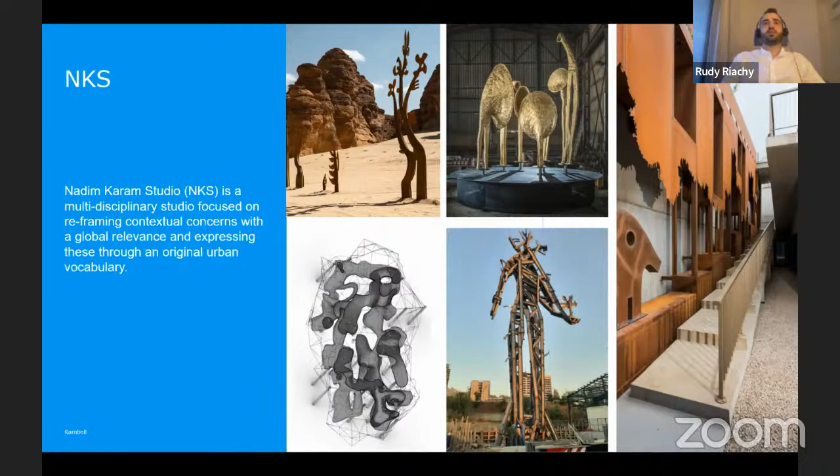So a bit about my background. First, I worked for 5 years in an architecture and arts office with Nadim Karam Studio and the artist Nadim Karam. We've done amazing sculptures, large-scale sculptures and architectural projects. And during that phase, after graduation, I was on a self-learning process. And because I loved computational design, Grasshopper and Rhino, I pursued this path more. I started self-learning throughout the years.

And after 3 years of work, I decided to do a master's in computational design in Catalonia, Spain. The master's widened my understanding of computational design tools and how to think. I built up my skills. So after finishing the master's and working a bit more with NKS, I moved to Ramboll to lead the computational design team. And since then, I've been less than a year at Ramboll, and we've done a lot of work and applied computational design in different projects.

And to start with, the idea of what is computational design, for me, I split it into two. First comes the thought, so it's a way of thinking. Then comes the tool itself. So the most important one for me is you need to shift the way you think. You cannot stay as you are. You need to evolve in your ways of approach on a project, approach on a problem, and you need to start using new tools, new thinking.

And of course, the older generation comes to me, someone 50 or 60 years old, a CEO, the owner of an office, a manager. To them, I say that they should know at least what computational design is, how to utilize it in their own work, how to help people train in computational design. And for the young professionals and students, I advise them to start learning the tools more, adding them as a skill set that would enhance their everyday work. And then comes the tool. So first, you know how to think, and then comes how to use the tool through this thinking and apply it.

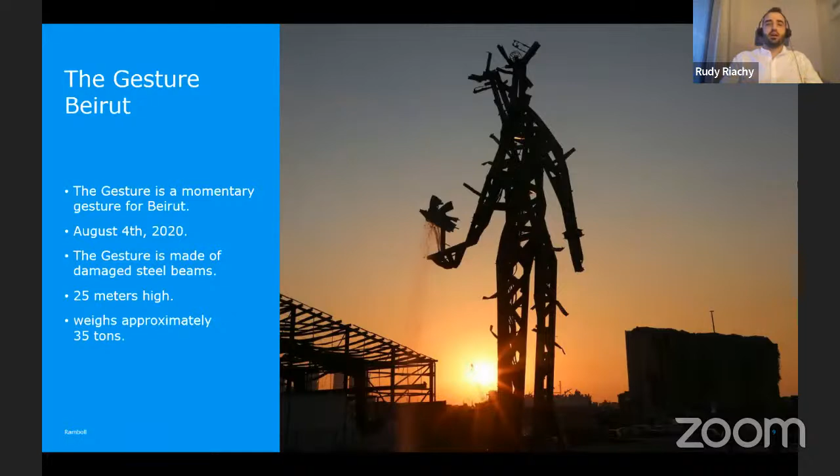After the explosion on August 4th in Beirut, some of you here might have heard of it. There was this big explosion that destroyed the port, destroyed almost half of the city, and a lot of people lost their homes, lost their loved ones, and it was a devastating time for the Lebanese people.

And we had to do it in a crunch time of 6 months. 6 months of not only design, I'm talking design, fabrication, and construction on site. So everything in 6 months. Of course, there's a lot of people here who have some experience, and they know that 6 months is nothing compared to a complex project. So we had to use computation. I had to use computational design to be able to match the deadline.

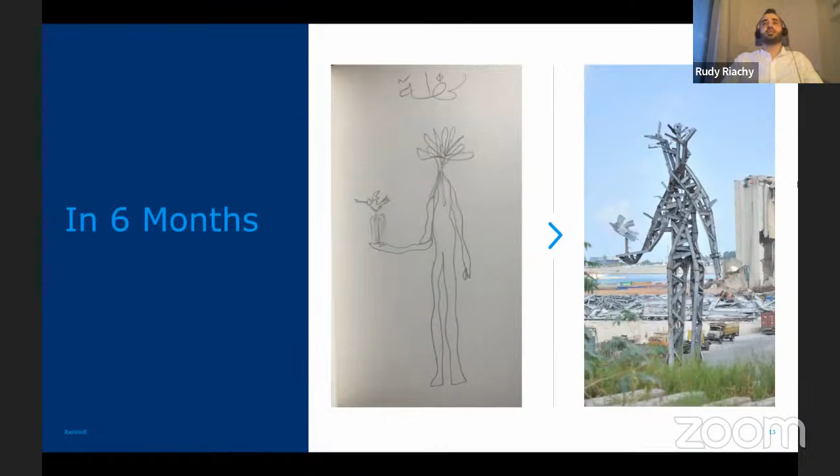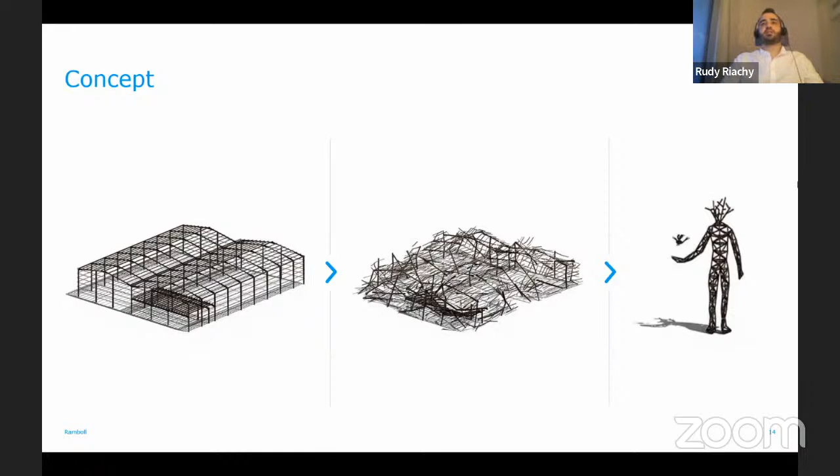Usually when we do these sort of big sculptures, we treat them as a building. So we have the design phase. Now we're thinking of the concept, how the destroyed hangar is being transformed into a sculpture. We did some envisioning of how we want it to be. And then I started working on the design.

So the artist, Nadim, is around 60 years old. He usually does the sketches, and then technically I do everything else. So I get his sketch, I try to create these iterations and options from the sketch. And of course, I didn't model one by one everything you're seeing. I used coding using Grasshopper.

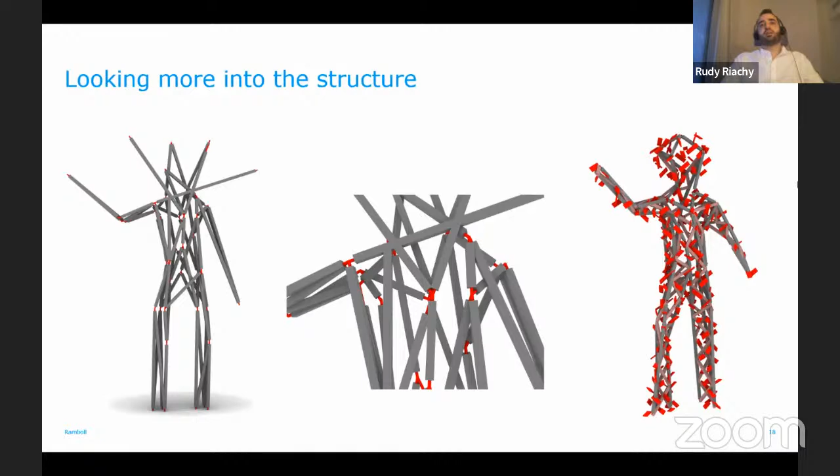Through scripting, I modeled, let's say, the skin, for example. For now, you're seeing the skin of the sculpture. I was testing different orientations, different scaling. So to be able to do it very quickly, I coded it. I also looked at the joints between the steel beams. We were testing different types of joints, different forms.

And the cool part about computational design thinking is you need to always think about the data you have, the information you can get. Everything is important in computational design. So every design option I'm doing is backed up with data, and I extract this data and I compare it with the amount of steel.

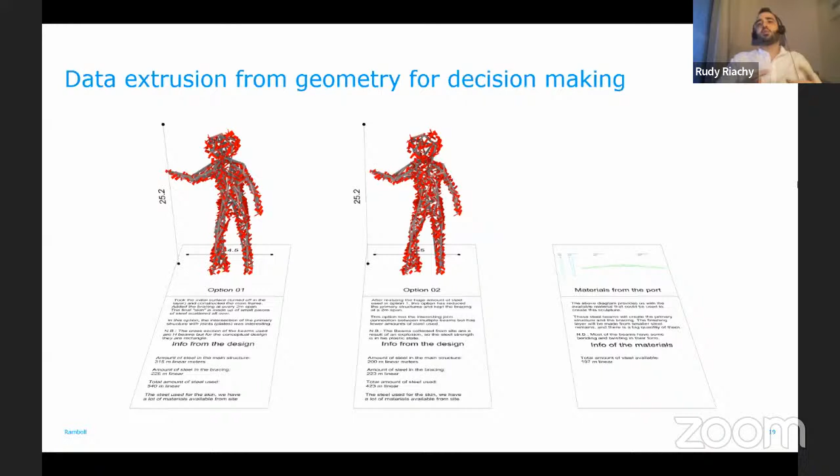For example, here I'm comparing the amount of steel I'm using in each option and how much steel is available from the site. So to be able to match the scale of the whole sculpture and not use excessive steel, while trying to utilize the most amount of steel that we have in the design.

And you can start seeing during the design phase, as we started to think of how it should stand. This comes with experience. I've done a lot of sculptures before using steel materials. So having 3 points of contact on the ground is a very good structural advantage in the design. And you can see these two colors on the body. One is the main structure and the other is the bracing. So we're already thinking early on about the structure together with the design.

And in a way, I'm doing both. I'm acting as an architect and as a structural engineer almost at the same time. Although I'm an architect, I'm getting some help from our engineering consultant, but the help I was getting is some guidance on, let's say, spans, connections and stuff like that.

So after looking at this, I was thinking, okay, this is a nice design. This might work, but the only issue is how to construct it. We are a bit tight on time. I think if I give them this 3D model to construct, it would take the whole 6 months to construct it, because every point is flying in the air somehow, and you have to locate it in 3D space.

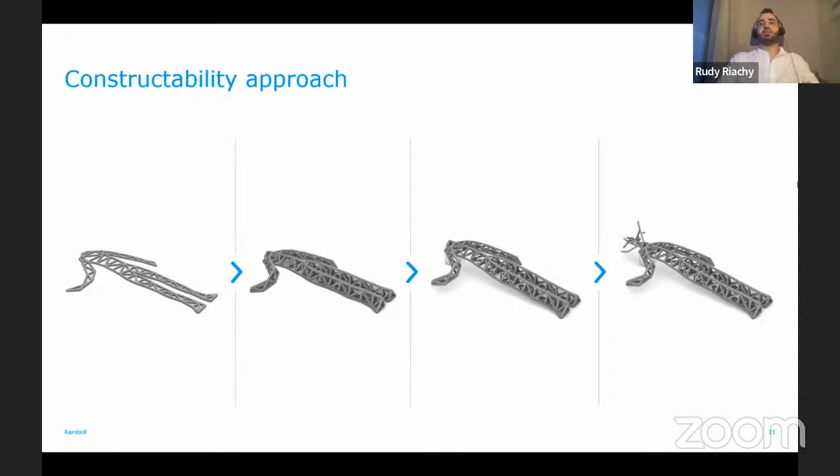So I came up with this idea: why don't we try to redesign it, but start flat with a 2D layer. So the people on the construction site can start on the ground, build the first layer, and then the second layer would come as an extruded version of it. And we elevate it and we do the head, which is the only part in 3D space, which is very easy compared to the previous design. And when I showed it to everyone, everyone supported this, the artists and even the engineers.

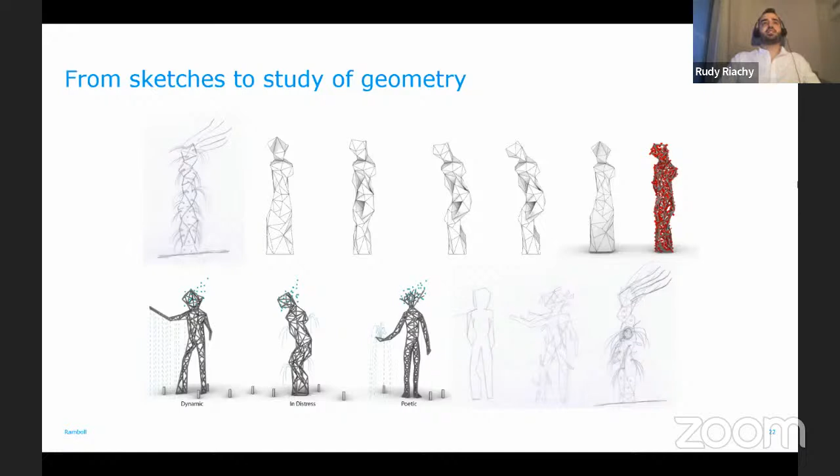So if I spent each week designing one option with its iterations the traditional way, we wouldn't finish. So of course, going back to meshing and using some scripting, I was able to create all these iterations from these sketches. And eventually the artist chose the dynamic version.

And this is what he liked, and this is what we took as reference. And going to site, I was a bit shocked by the scale of the beams. So when you work in the digital world, you're away from the actual site. When I came to site, no one can lift one beam. So you need to use these machines to lift every beam and to place them on site.

But now the issue is we designed it with perfect beams, but actually the reality is these beams are destroyed. These beams are damaged beyond repair. And the purpose of our sculpture is to use these damaged beams to create this design. So someone came up with an idea of 3D scanning the beam. And it was for me the first time professionally working with someone on a 3D scan.

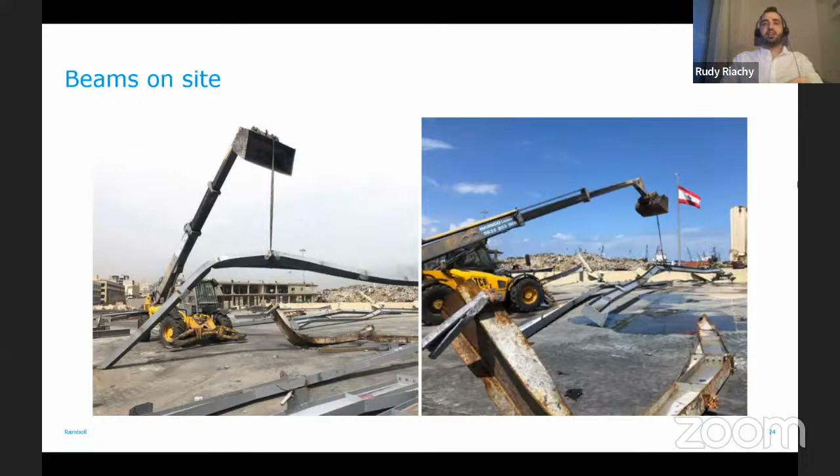The 3D scan company that we contacted was new in Lebanon. What I expected from them is to give me each beam scanned in a nice 3D file. However, they gave me one big file, a 30 gigabyte file, hundreds of millions of points. What they did is they placed cameras throughout the whole site and they scanned everything at once, creating one big, huge 3D file.

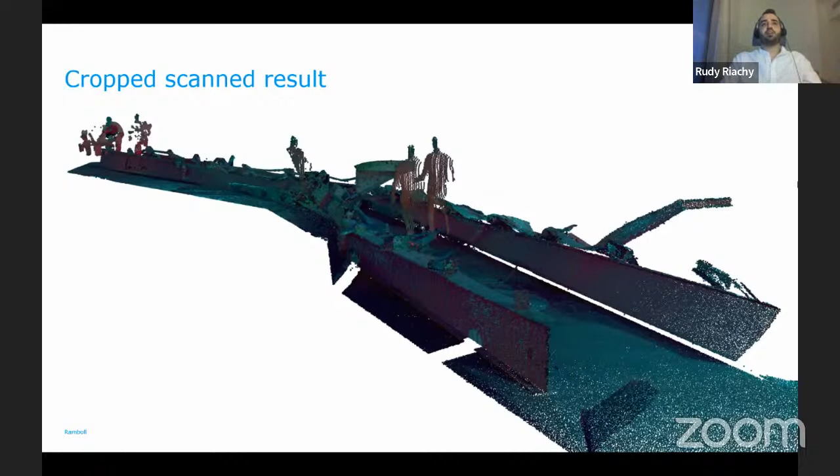What you see now on your screen is just a cropped version from this file. As you can see, they scanned the people, the machines, the floor, the debris, everything is scanned. And you can see all of these are points. This is not a mesh. This is just points on top of points. So this was the first time working on this huge point cloud for me. But it wasn't that new since I already work using computational tools.

So I just learned a couple of software that will help me clean and then try to rebuild using meshing techniques and algorithms to remesh from these points and create these beams. But then these meshes are too accurate, and we thought that we don't need to exactly model all the minor damages. What we need actually is the full deformation. So what I did is isolated each couple of beams and then redraw them using some tracing technique in Rhino, and then using Grasshopper and Rhino, cleaning them and then redrawing them.

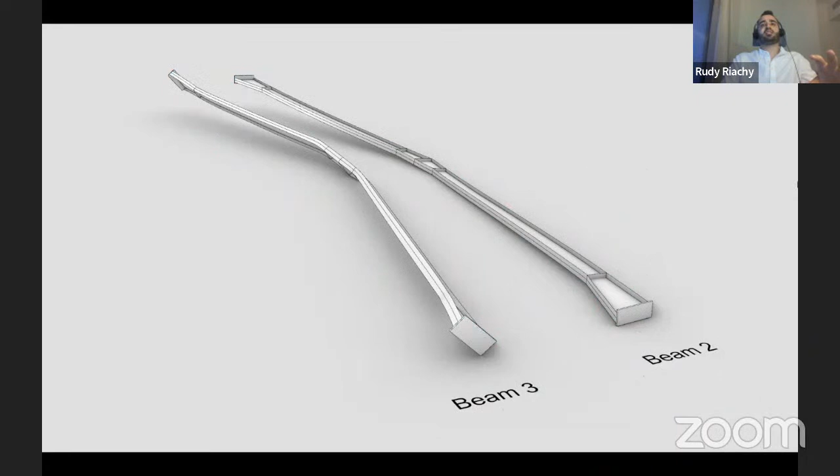And you can see how I extracted from the scan the beam itself in 3D, and this on and on until all the beams that were scanned are modeled. You can see how cleanly they are modeled, and that these are labeled directly. After labeling them on my file, I went on site with a spray and started spraying the labeling onto the beams, not to lose each beam if someone moved it by mistake, to keep the labeling along. And now my OCD is happy.

All these beams are placed in one space. So from here I got the data: how much linear meter of steel we have, the shapes we have, and the amount we have. So now we can go back to the design. We created this data sheet of the cross sections of these beams because they're different cross sections. Some beams came from the hangars, some from the roof, some were vertical elements. So each beam had its own size. We wanted to use the big sizes on the lower part of the sculpture.

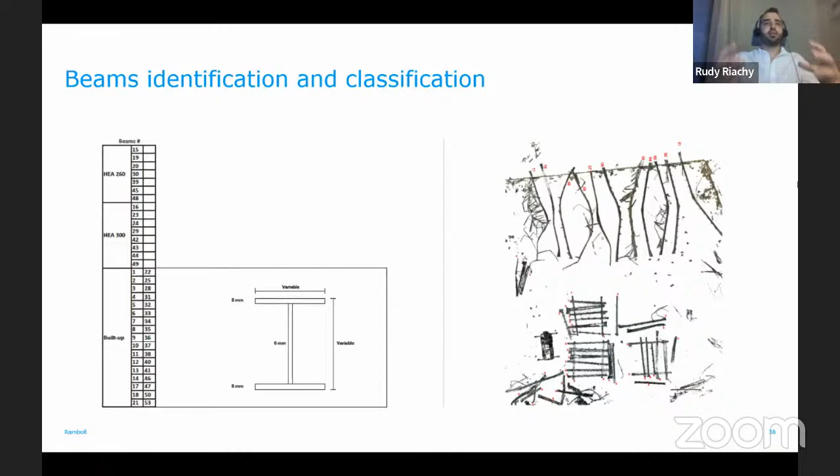And now comes the real work, which is designing. We're taking the 3D model that we did before and placing on top of it the new beams, the real beams, the ones that are distorted. And I tried to benefit from these distortions. You can see the hand is this one element beam that almost looked like a hand; it fit perfectly in that location.

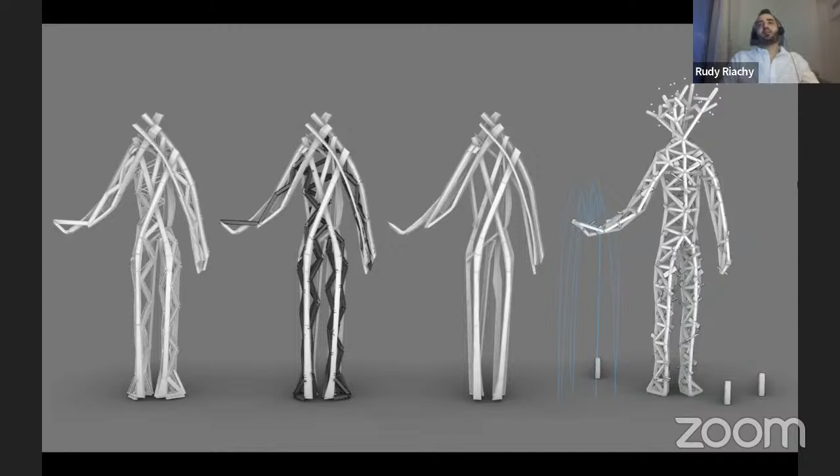So it's a design process where I tried to place the long beams to create the legs and the torso, and the smaller beams to create the hands and other smaller details. And after cutting some beams, also labeling them, tracing them. We went from doing the primary structure, which is the white one, and then the black part is a sort of bracing from the beams, and then we designed the whole thing from the actual beams themselves.

Because we are crunched on time, we don't have the luxury of designing and then sending our engineering consultants the 3D model with the 3D geometry, and then them figuring out how to analyze the structure. What I did is I tried using Karamba, which is a plugin in Grasshopper. Although I'm not an engineer, I understand through my experience, when I get these results, what I can modify in the sculpture.

When I eventually sent the sculpture to the structural engineer to analyze, he came back with maybe 15% of changes. Maybe he added some connections, some minor changes, but the overall design was logical for him. This saved a lot of time, doing the design and the analysis at the same time. Of course, there would also be post modifications. The artist might still change some stuff.

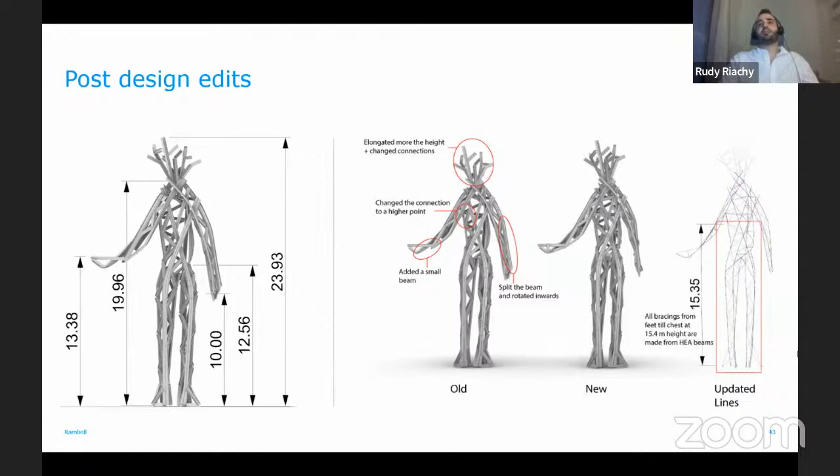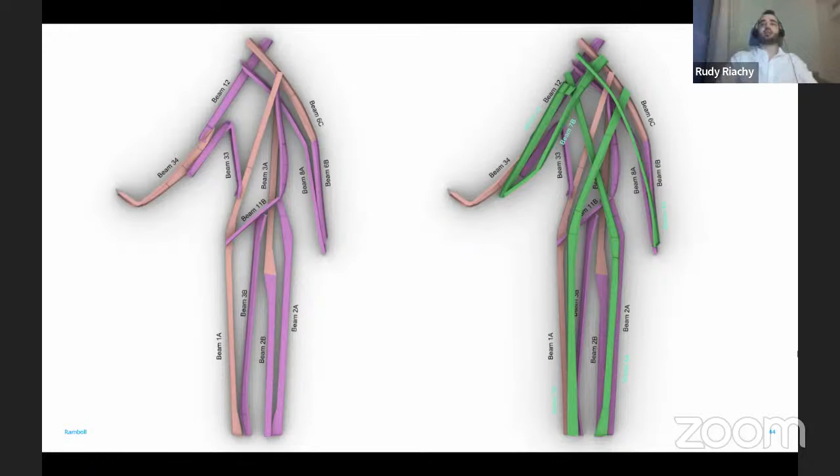These are some of the construction drawings. Earlier I talked about how we were going to build the first layer on the floor. You can see how easy it is now: on the left side, the first layer, they can just place them on the ground, weld them, and then place the green part on the right, on the elevated part. This was super easy on site. You can see all the documentation on where to cut the beams and which beams we will use where. We also created fabrication drawings with the location of each bracing. We even designed this bird on top of the hand of the sculpture.

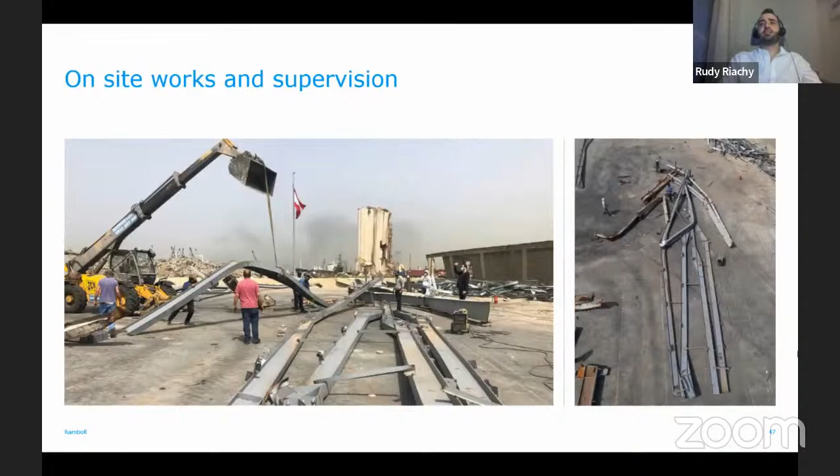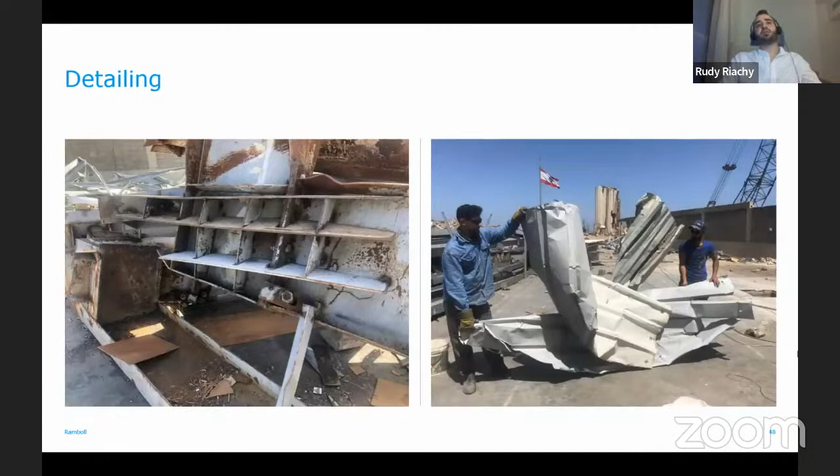I was doing my master's in the meantime while working on this project, so I hoped someone else would take charge of monitoring the site work. But because the drawings are a bit complex and I was doing the whole process, eventually I went down on site again and had them build the sculpture. It was fairly easy. We located the key points on the floor, and then, referring to my fabrication drawings, we were able to build it. I had to make sure all the joints were clearly welded. These are some pictures from the construction site.

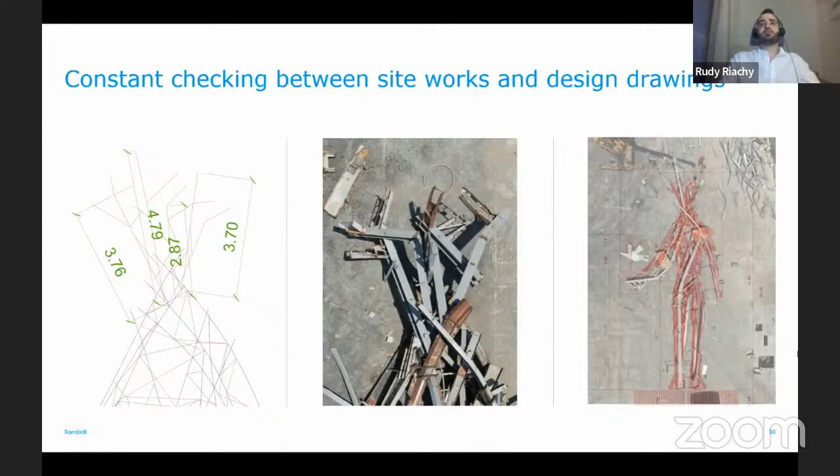This is the site where the explosion happened, behind the sculpture. You can see some zoomed-in shots of the head, how we were building it. On the right side, I always try to double check our work. Since we had access to a drone, I would take a picture, go back to the office, and overlay the drawing on top of the picture. Funny enough, everything is matching except for the hand. The actual hand looks a bit lower than the red digital one. So when we went back to site, we fixed this. All this double checking makes sure everything is in place.

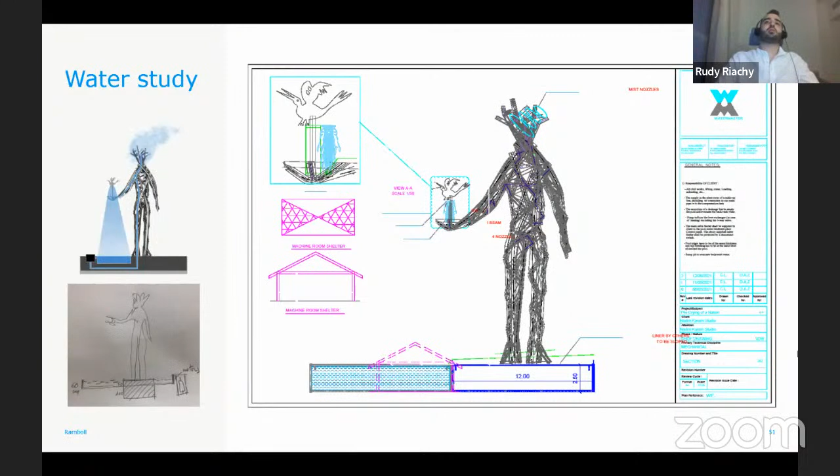Also, the artist wanted a sort of fountain coming out from the hand, coming down to a basin or pool, and then circulating the water for the fountain effect. The pipes weren't designed digitally; these were done directly on site. Sometimes when you're tight on time, you need to work on stuff directly on site. So we made sure that the pipes ran smoothly and were fairly hidden.

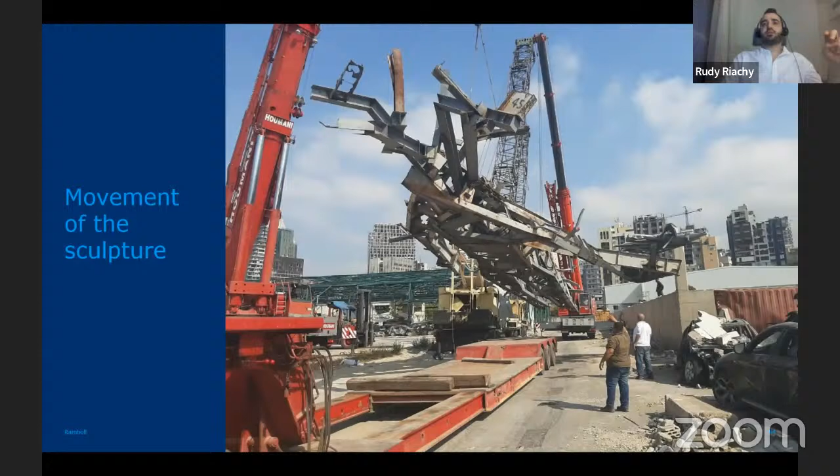Of course, there are other structural studies on the foundation. There were also issues on how to elevate it, how to fix it, and how to pour the concrete. All of these studies were done, and through team effort, we found a solution to make it stand. For the actual moving part, we used two cranes to lift it from the site onto a truck, and then the truck would drive it to the final location.

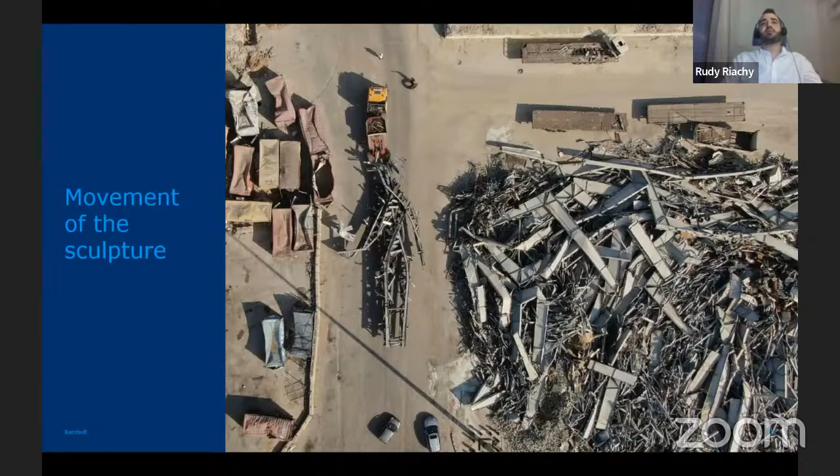Just to know that this sculpture was done without any support of money. Everyone just provided his time and expertise to build this. And so here we lifted the sculpture and we placed it on site. You can see the scale of the sculpture. You can look at the picture on the right.

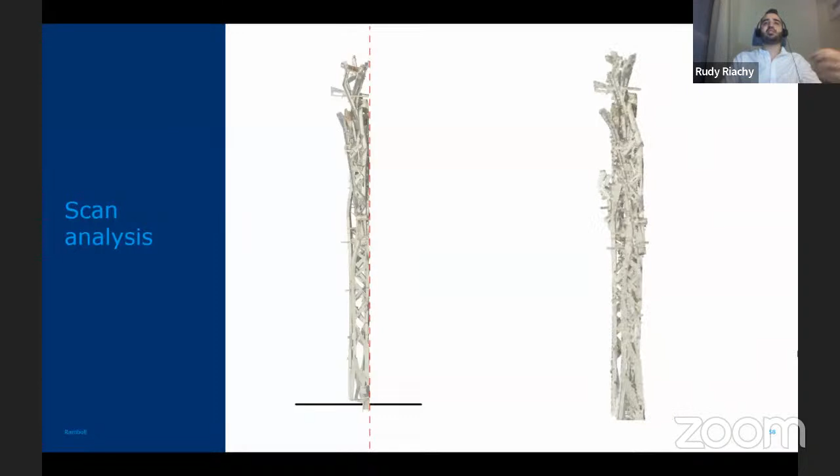And me as, let's say, OCD, I wanted to make sure that the sculpture is really standing straight. So we did another round of 3D scan. I called the same company, and you can see the red line and how the sculpture is standing almost perfectly straight. And this is like the dream of every engineer, for his design to be as perfect as it can be. These are some drawings of the event and some drawings of the sculpture, and this is the end result.

After finishing the sculpture, we had a small discussion in the office of doing a small mock-up model. We were thinking of first doing it by welding small pieces of metal, but then I told them, why don't we do it as a 3D print? I had the 3D printer back then. So using Grasshopper and a bit of computational design, I was doing some different options. Since with 3D printing you can go wild a bit in the design.

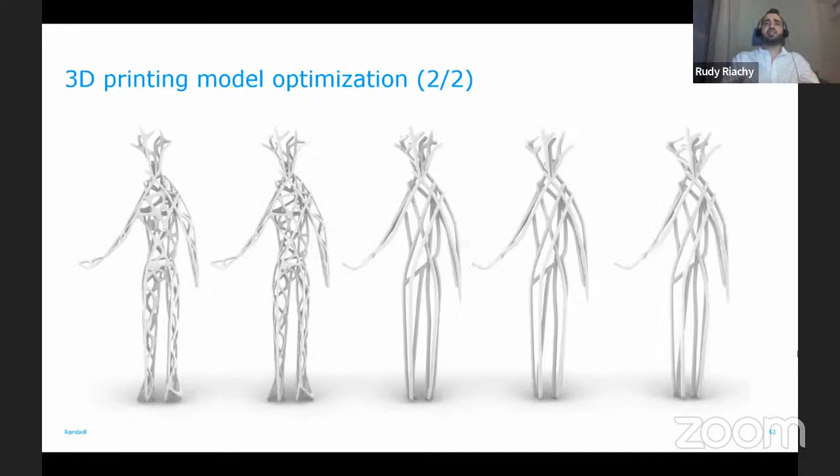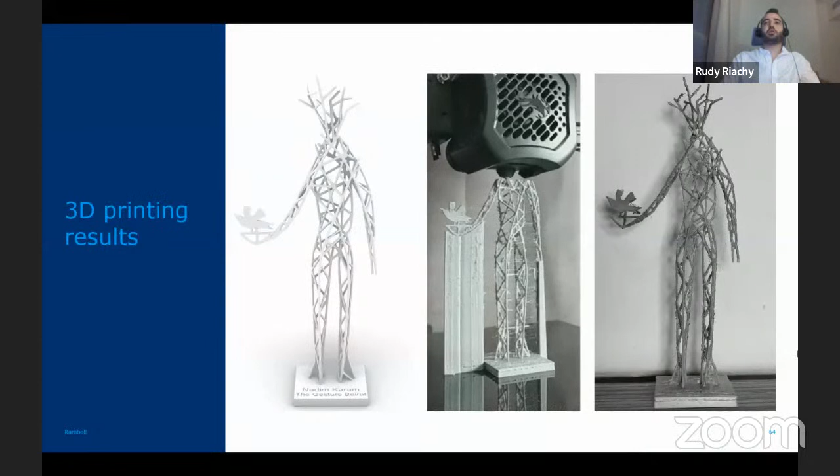Did some iterations, some options, and eventually ended up doing this design. And you can see the process of 3D printing it and the end result on the right side. And this is another, let's say, hobby for me, which is 3D printing. But computational design allows you also to go into these different tools and use them. So this was the first example.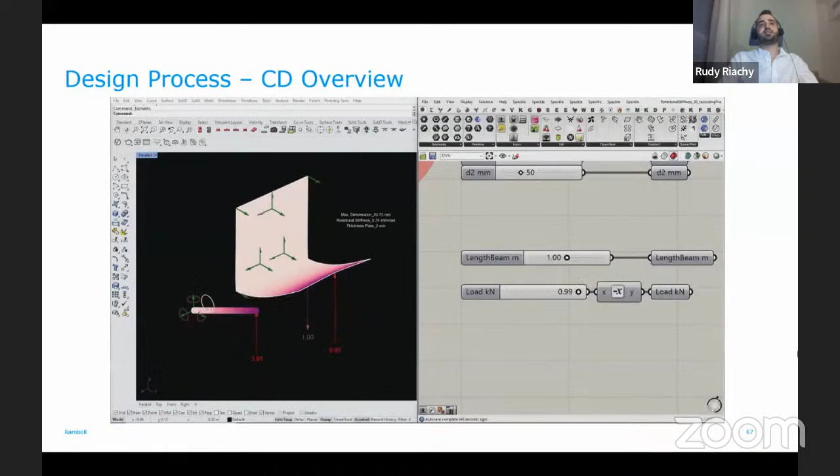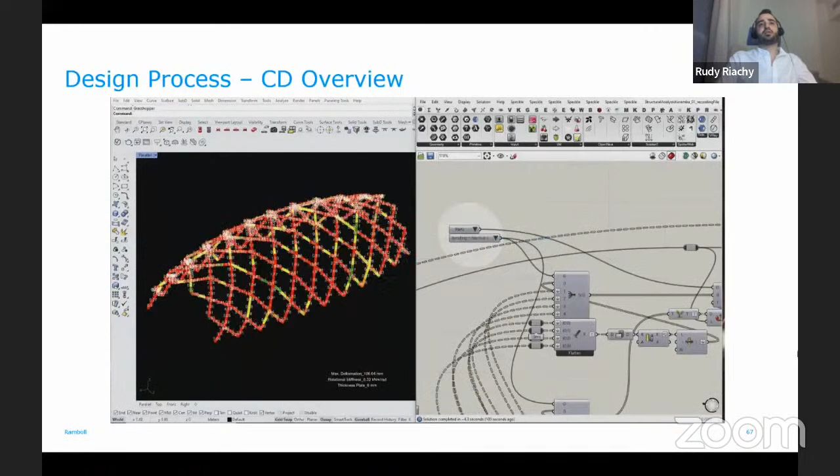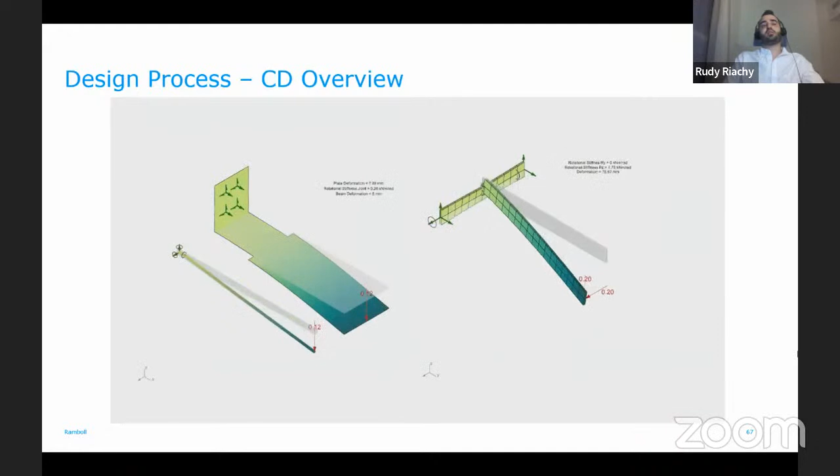And here we're trying different connections, doing mock-up models, testing the stresses and loads, and using all this data to get it back into the software. The more we study it in real life, the more realistic our digital world is, so that we can be as accurate as we can. And here they were testing the bracing and the connections.

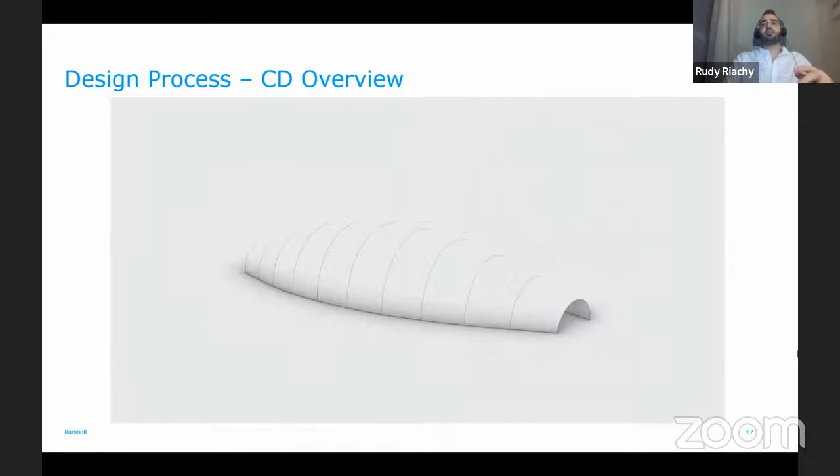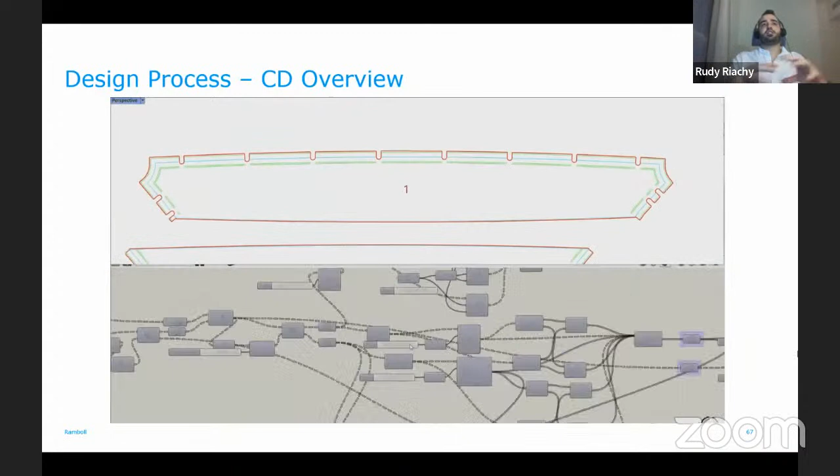After that, we went into how we're gonna build it, the process, and we modeled every single detail in Rhino so that we don't miss anything. Also, for the structure that's covering it, we used Galapagos, which is an optimization technique, to find the best sheet layout, and then also used Grasshopper to automate the 2D drawings from these sheets.

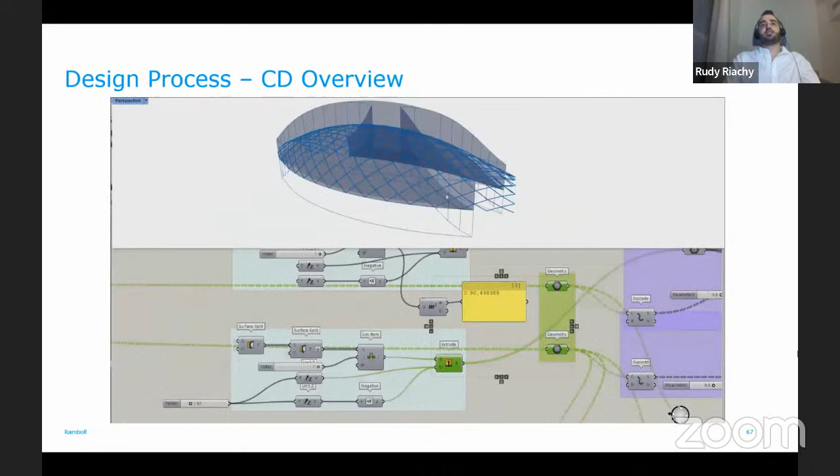So technically, all the process was automated. So every time we did a change early on in the design, on the shape, everything else would update automatically. And that's one of the powers of computational design. But I don't want to only focus on computational design as the tool. I also want to focus on the thinking, as I mentioned before. We cannot get rid of the design process.

You cannot skip these steps—you need to still sketch, you need to still team up, you need to think of solutions. Computation design doesn't replace these steps. In fact, these steps enable computation design.

As you can see, we try to measure the actual scales of stuff, the detailing of connections, and then use this information, this logic, to translate it through a code in a script and then design it. And then we would have more control over the design. Everything we did was well designed and tested by hand first and sketched.

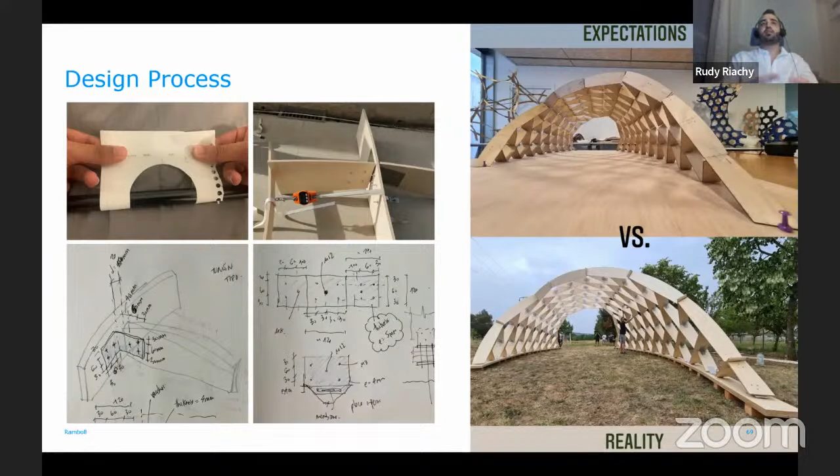And then we moved from this process to the actual code and eventually designing it. Combining this design process with scripting and model making and testing, you can see on the right, the physical model on top, the mock-up model, and the actual building beneath it—it's almost the same. If we Photoshop it a bit more, you won't know the difference. That's the power of having this design process well designed and all the data well plugged into our code and script.

Then came the design building process. We were in charge also of building it, so we made sure that we could lift every element, we could build it by hand without using any machinery. And after building it, the first thing I look at is details.

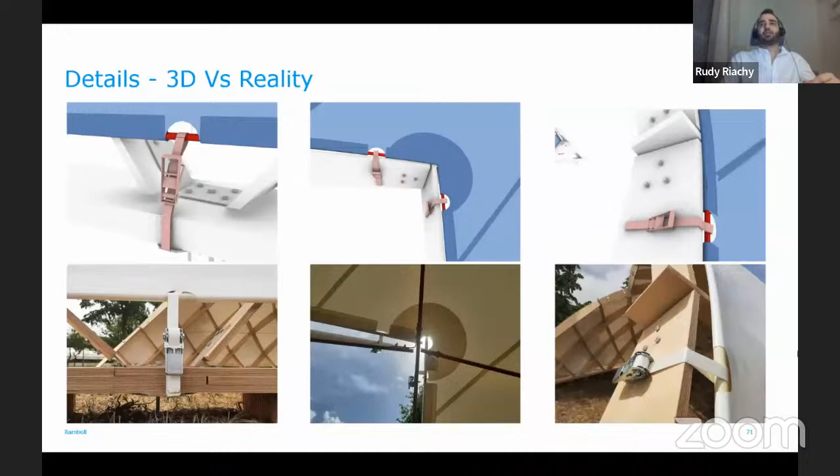As an architect, I love to see this part. So I took the pictures from the model and from the actual built structure, and I start comparing them side by side, which is a fun exercise to see how matching it is. And this is the outcome—the end results were very satisfying.

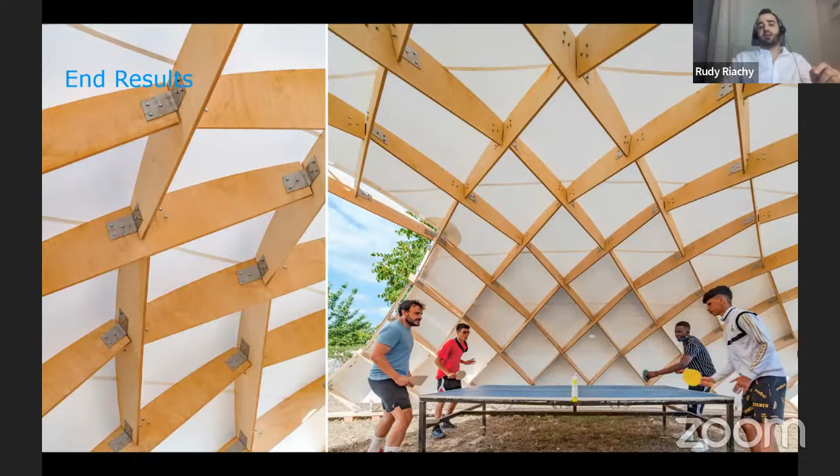This structure was built for a school—a school for students with needs, for special students. And this structure was used for outdoor activities, and also occasionally for outdoor classrooms. You can see how beautiful the structure is standing, very nice and well designed. So this is another power of computation design, shown through this example.

Now, the last example—I was just thinking of how to show you that computation design is not only for engineers or architects, it's just a way of thinking and translating logic into anything. So I picked an example which is a bit unorthodox.

It ties in with a small story. Before joining Ramboll, I was going to join a PhD program in Germany, and one of the interviews was with one of the candidates who might be hired for this PhD program. They had this exercise for us, and the PhD program dealt with diatom shells. They were studying these cellular geometries, structures of diatoms. A diatom is like a one-cell structure, and because it's a one-cell structure, the structure should be efficient, it should be good, and because nature is the best reference for us—

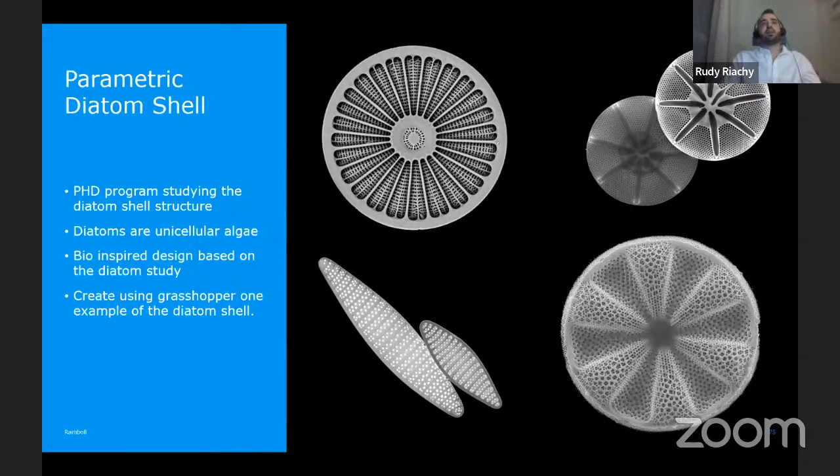part of the PhD's purpose was to study these organisms and try to imitate their structural behavior or structural design, and then apply it to real-world design solutions. So the exercise was for me to pick one of these diatoms, which I picked—its name is hard to read, I read it once: Actinoptychus splendens. I picked this because it intrigued me. I love the challenge, and I wanted to show them that I could design it through computational design.

So I did some research about this. This was a one-cell circular shape. It had mountains and valleys, two layers, and each layer had a different sort of perforation. This is a small explanation based on observations from scientists and from what you see in the picture—this was the only microscopic picture I had as reference.

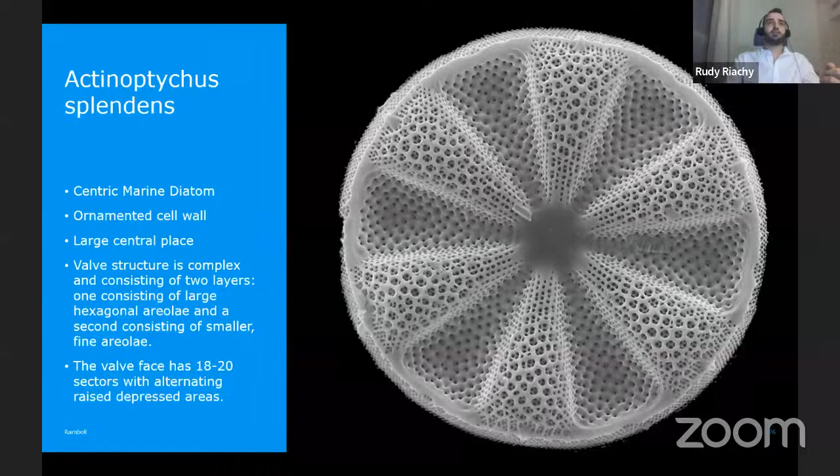Now I'll show you the thought process of how I used computation design thinking and the logic to dissect a geometry and build it through coding. First, I took a circle, sliced it like a pizza into triangles, and then these triangles would form these mountains and valleys. Step three would be having them alternate and creating two different layers, because the structure is made from two layers—so I made sure there were two layers inside.

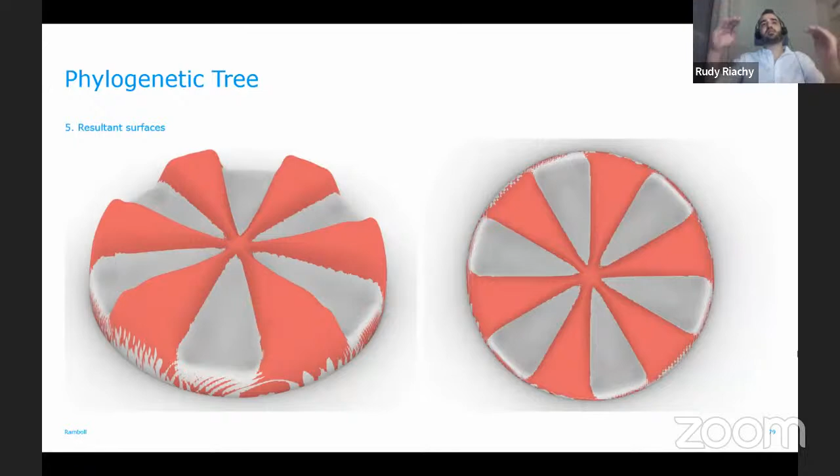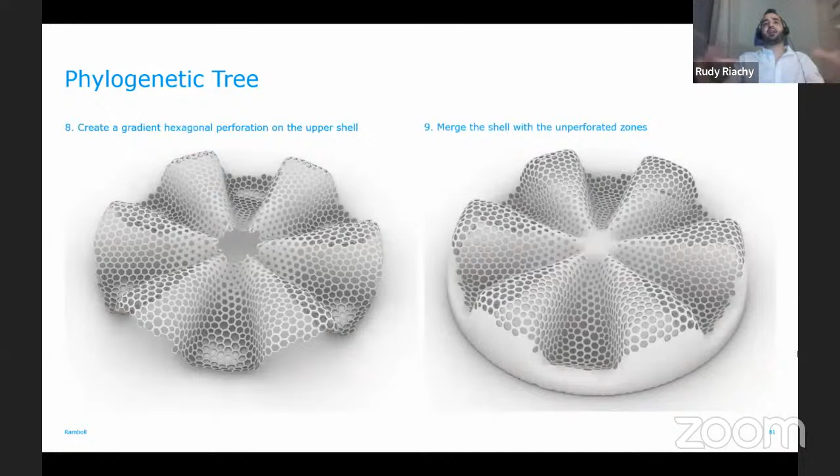After creating the surfaces, you can see the red surface is different from this—these are the two layers, but the two layers are in a way intertwined. After this, I did some meshing, and then applied some algorithms to create these openings. These openings would vary from the sides to the center, and in scale.

And then this is the second layer with different openings. The second layer has more circles in it, more perforations, and different scale of openings. When you merge both layers, you can see on the left it almost looked like the actual organism. And this is fine.

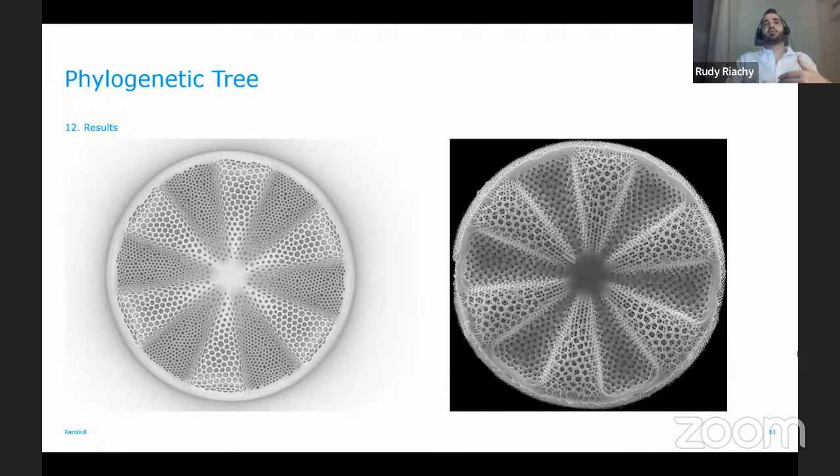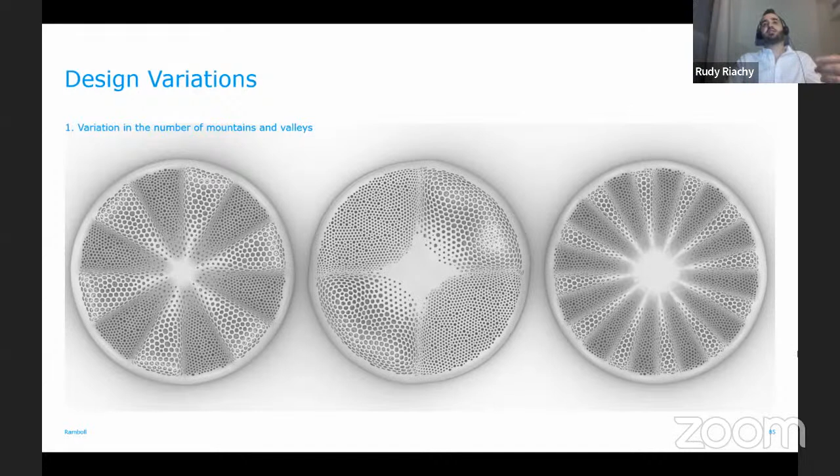This is like we modeled this, done through Grasshopper. But now comes the real results, where after doing this code, you can play around with it. Technically, when you design something through Grasshopper, you can go back and change stuff. For example, now I'm changing the number of valleys and mountains, and you can see the geometry updating. I built the code one time, and all of these iterations you're gonna see are just parameters I'm changing in my code.

Here I'm changing the number of valleys and mountains. Here I'm changing the inclination angle. Here I'm changing the perforations, locations, and scale. So I have full control over the geometry. And also here I'm applying the same code, but on a different geometry.

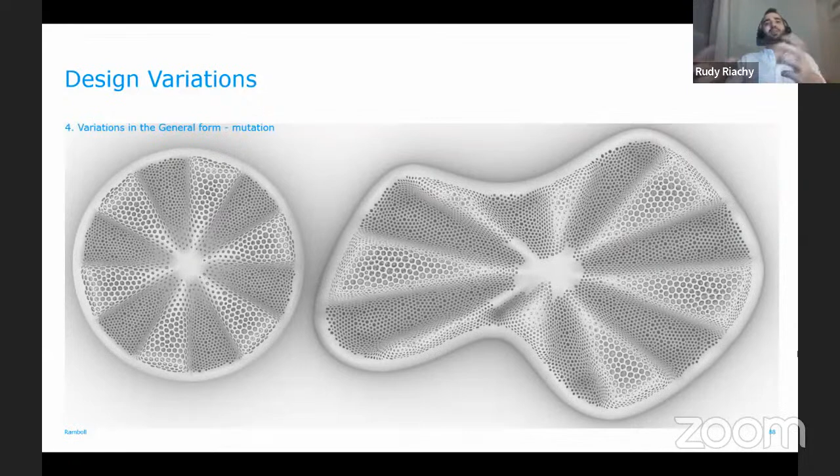I can assure you that I can use the same script to build a facade from the same logic, or a roof of a building from the same script, and it will apply. This script had one purpose, to design this diatom, but then I can use the same script to design maybe a roof of another building. You can see how computational design is not limited to one thing, and you can use it wherever you see fit.

I love the detail level. As you see, I always try to match everything at the detail level. I use some voxel algorithm technique to merge the two layers to have this organic feel and texture. And this is for the third example.

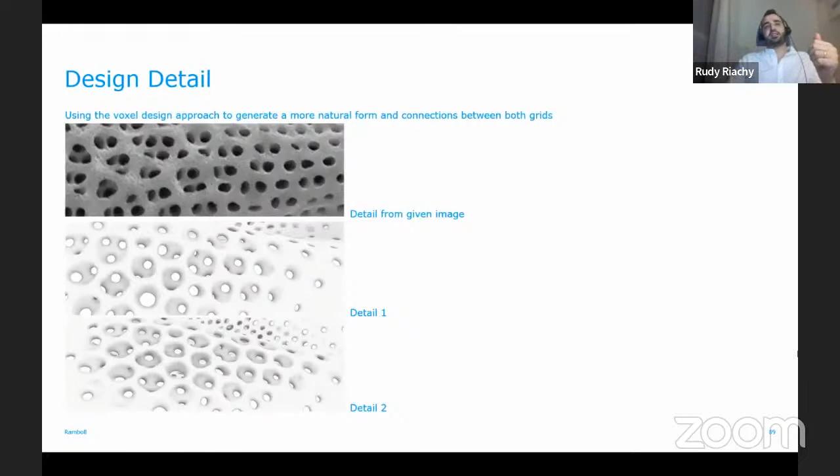Moving from the examples into this topic, which is very crucial I think for me and for everyone in the audience, this is talking about visualization.

As engineers, I know from my friends and colleagues that they don't like to put effort on visualization, producing nice visuals, because they think it's a bit exhausting. It needs a lot of post-editing software like Photoshop and Illustrator, and usually they deal with the structure and the analysis, and try to leave the other part for another colleague to do the nice visual from it.

I'm here to try to prove them wrong, and to push you to create your own visuals in a simple way. So here, everything you're gonna see was done only in Rhino and Grasshopper, and you will see the potential.

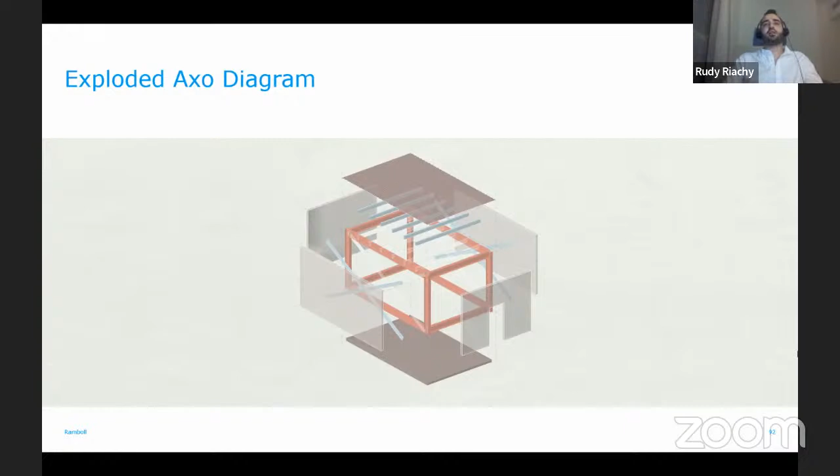But then when I showed them this diagram, they were like, of course use Photoshop, of course use Illustrator, or use all these post-editing techniques combined with Rhino or other software. Funny enough, I didn't use any of the above. I only used Grasshopper. So this whole diagram was built in Grasshopper.

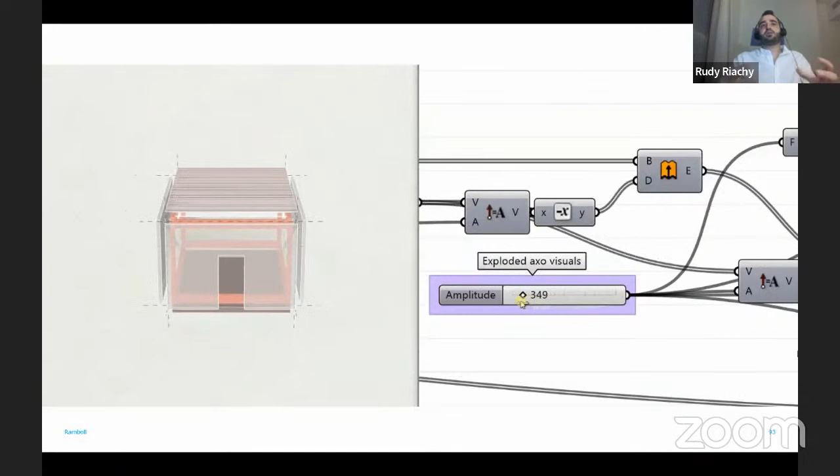So I can have full control on the dimensions, on the cross sections, on thicknesses, on the type of structural system inside. I can close it, I can open it. You can see how interactive the script can be. So there wasn't any Rhino work. Everything was done through this script.

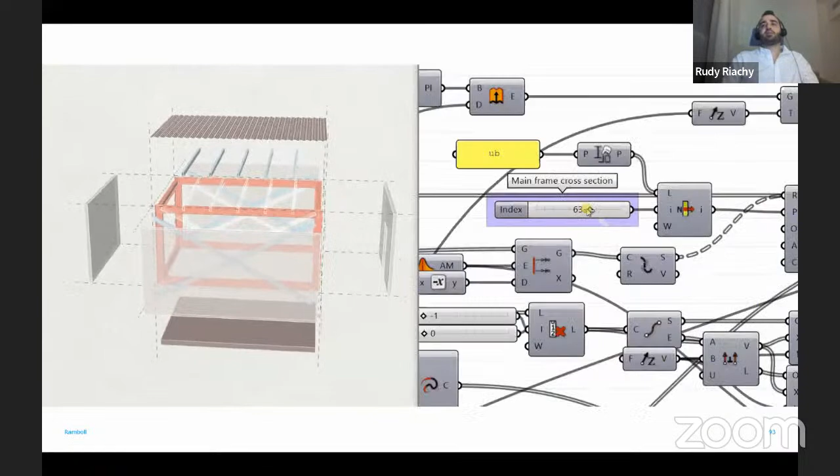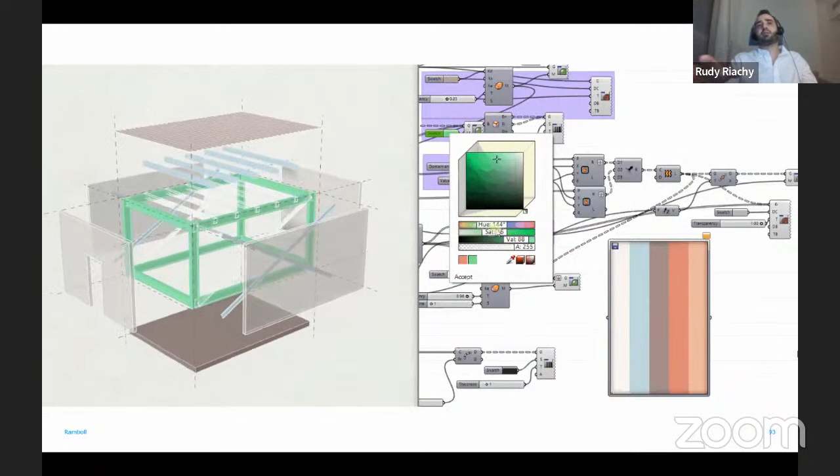Even coloring the diagram was done inside Grasshopper. And imagine I will do this one time, and for any upcoming project, any upcoming case scenario or exercise, you can see here the colors, and how you can put the color palette inside and pick the colors.

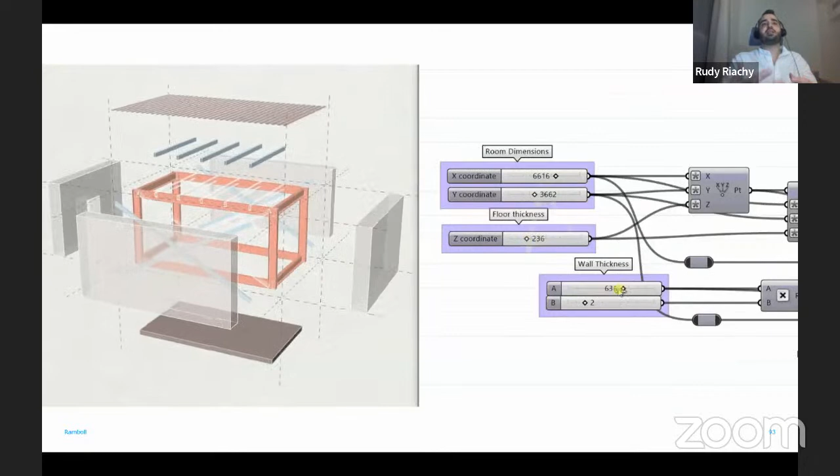So whatever modular design I have or room I need to design in the future, I open this script that I did one time, and then I can use it multiple times in multiple projects in the future. So this is another strength of using Grasshopper in visualization and in modeling.

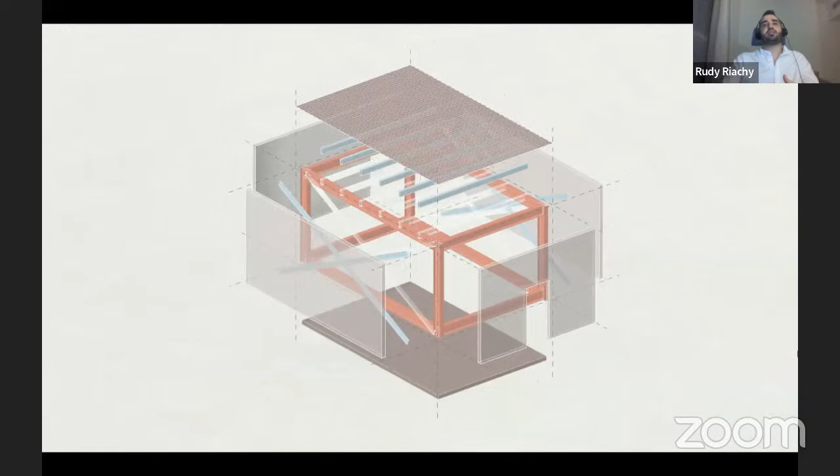Since I did it in Grasshopper, and Grasshopper works very well as an animation outcome, I can create this animation for the client to explain the capabilities of the design, for example, or the variations that he can control from the script. So all of this, between diagrams and animation, comes along with computational design.

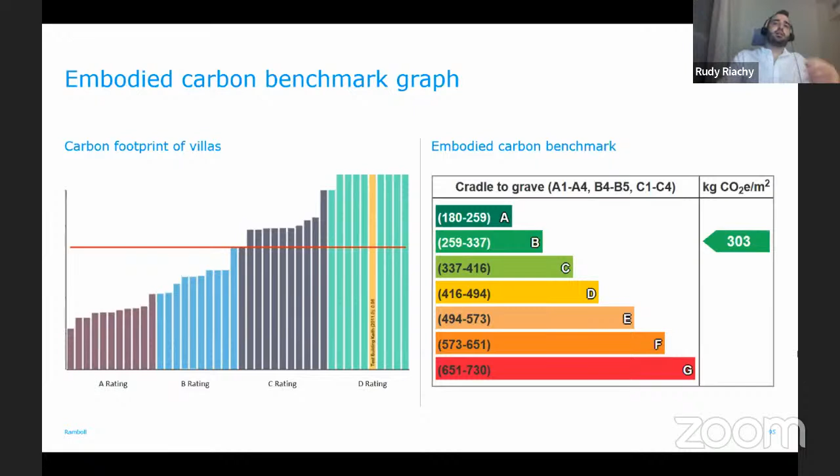Another case scenario is my sustainability team in the office. When they do the carbon footprint or carbon calculation of the structure, they usually do this graph, and they wanted to be consistent. So I created this script, coding a simple visual bar graph that updates the color according to a certain number. They can simply add any project, punch in the numbers, and the visual updates the color, with consistent, nice results.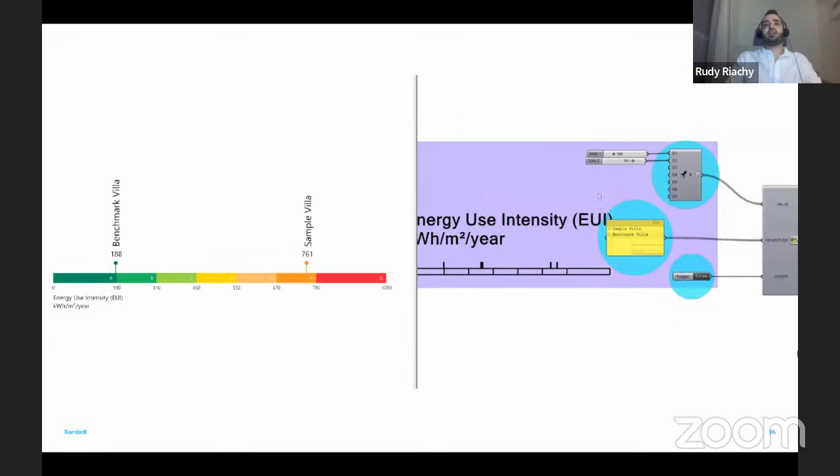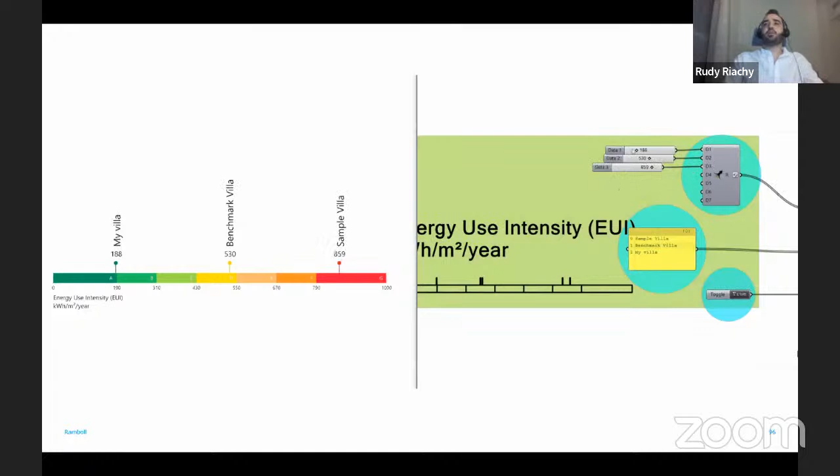I gave them not one option, not two, but 4 options, different styles, different coloring, different layouting, so they can have more options to do these diagrams quickly. I even gave them a vertical layout, in case they want to place a vertical diagram in their project. This ensures that right after I finished the script, they used it directly on the next project.

You can see this is how they placed it in the report, and it's always consistent. So if they do the next 10 reports, all of them will look the same, high quality, and each diagram, instead of taking half an hour to do the colors and everything the traditional way, would take 1 minute using my script. So this is part visual, part efficiency.

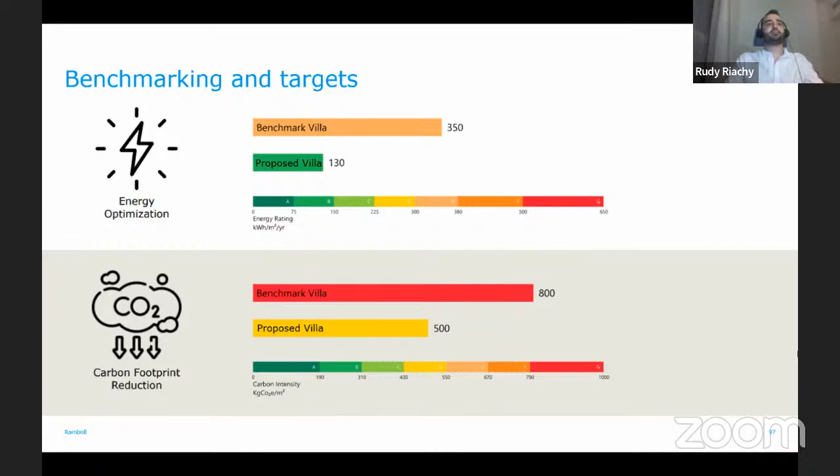And give them more than one option even. So this is another case scenario on visualization, and at the same time using computational design to create these geometries.

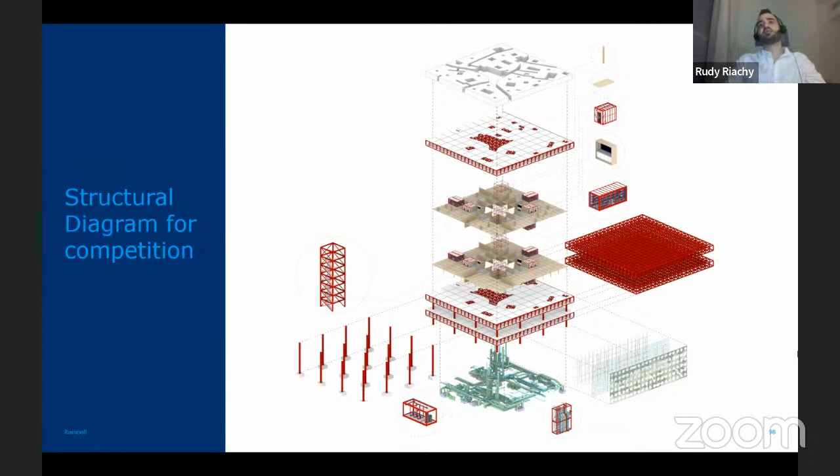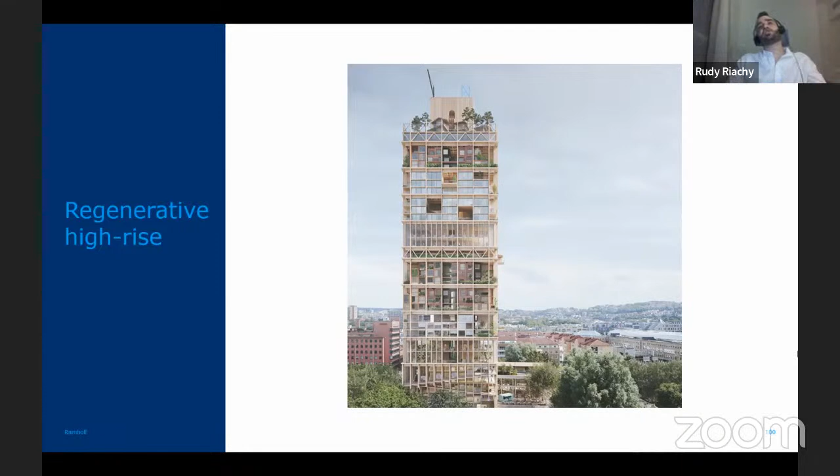Another example is this regenerative high-rise concept tower. You can see on top of the tower there's this crane sitting, and the concept is that this crane is permanent, and the tower would change its functions throughout time. Let's say in 2030 it has a certain program, but after 20 years they want to change it from residential to office building, and maybe introduce new functions to the tower, keeping the interior changing but maintaining the mega structure.

These are prefabricated wooden structure, 2D and 3D elements, either rooms or panels and walls prefabricated that you can choose and arrange the layout. Over time you can remove, let's say, a room, and then using the crane on top, change the layouts of these prefabricated levels. To do a quick simulation of different layouts, I used a script to model these options.

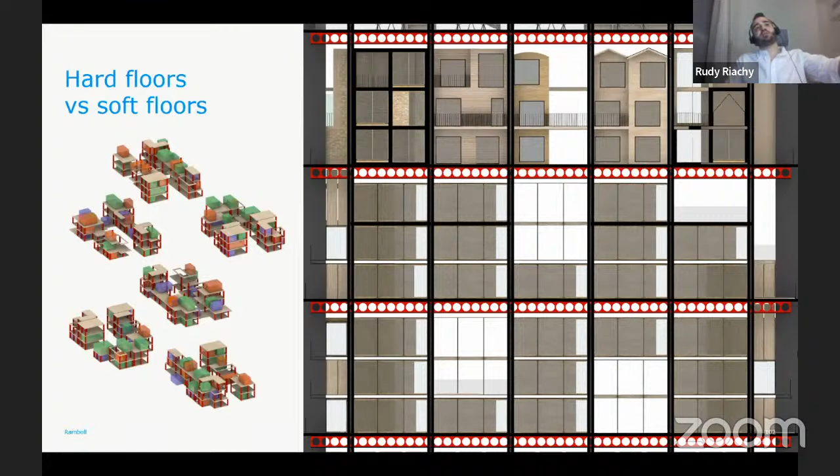You can see on the left, this wasn't done manually, this was done through a script. So I would do random layouts quickly, so you can see different layouts on the same floor. So imagine this layout would change after 20 years. They can see the changes.

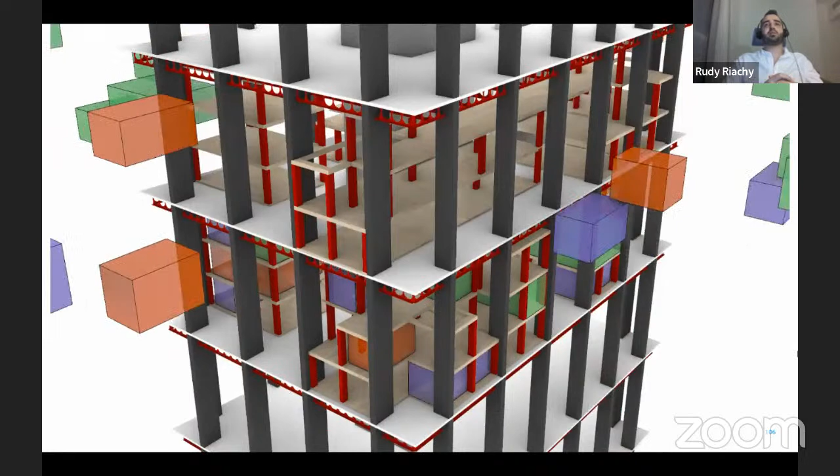And what's easier than showing an animation of the concept? So you would place the layout in between. You would place these elements, you place these rooms and functions, and then when you want to change, you can use the crane on top and remove these layouts and change them.

And this animation is very simple, straightforward. It was done using only Grasshopper in Rhino. And since I have already everything done in Grasshopper, I just did the animation very quickly.

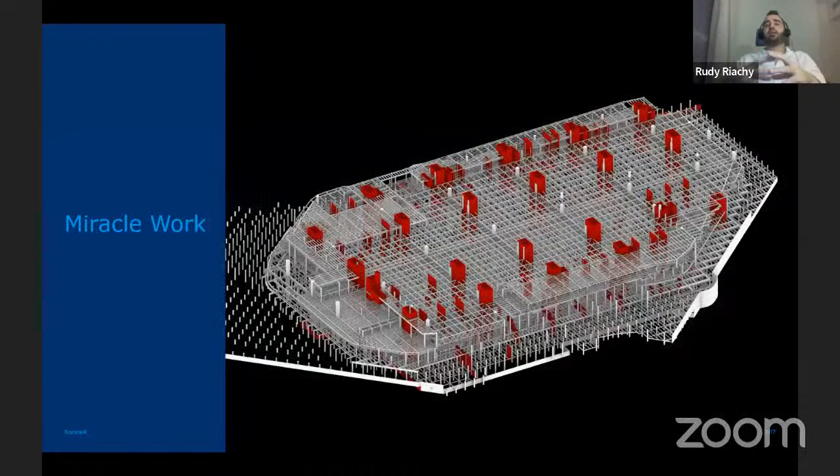And when they came up to me, they were like, we have a very tight due, and they didn't update any of the trusses, and the architect did a big change in the design, and they had 1 day to update the whole structure. And they didn't touch the trusses yet, and the whole stadium is full of different trusses. And they wanted me to help them to update all these trusses inside Revit.

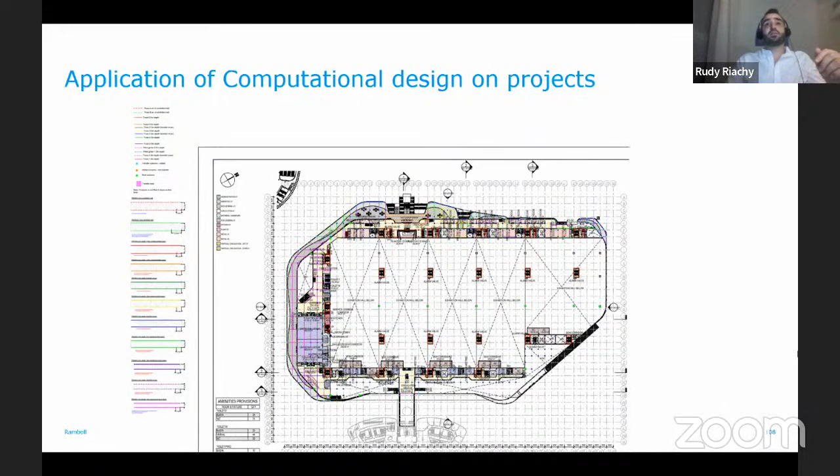And thinking just about one floor level, to draw all these trusses with the right dimensions, the right cross section, if you're using the traditional approach, you would never finish in maybe 2-3 days. And they wanted all these trusses in 1 day. You can see the stadium has several floors, and this is zoomed in.

What I received from them is PDF markups of color-coded lines, and each line would represent a type of truss that will be placed in this location in the PDF. So this is my input in a way, and to be able to do it very efficiently and quickly, I open Rhino and not Revit.

And what I did is I took these PDF markups and I placed the exact location of these trusses and the same colors, and I matched the colors with the type of truss in the layers and in my Grasshopper script, so that when I put one line in my Rhino file, Grasshopper would create the whole truss in 3D. So all I had to do now is just put the lines in the right layers, and the script will do the rest of the job. It will do the whole truss.

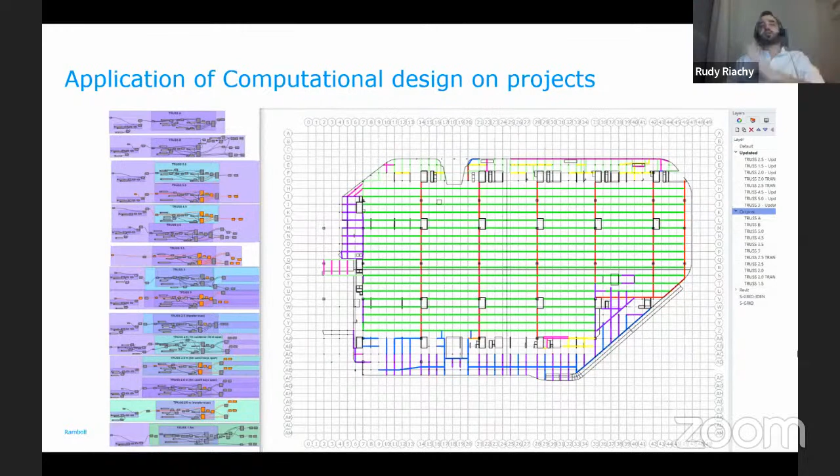It will then push from Rhino, using Rhino.Inside.Revit, all these trusses into the Revit environment. And when I've finished pushing these trusses, you can see this outcome. So I gave them the Revit file separately, and then they linked it into the main model, and everything was working perfectly. There were no errors, no clashes with anything. The sync between Grasshopper, Rhino, and Revit was seamless.

And we were able to pull it off in 1 day of work. And because we did this script, and because the stadium didn't end on that due, and there were more dues to come, we kept on using the script, and we reduced a lot of time of work.

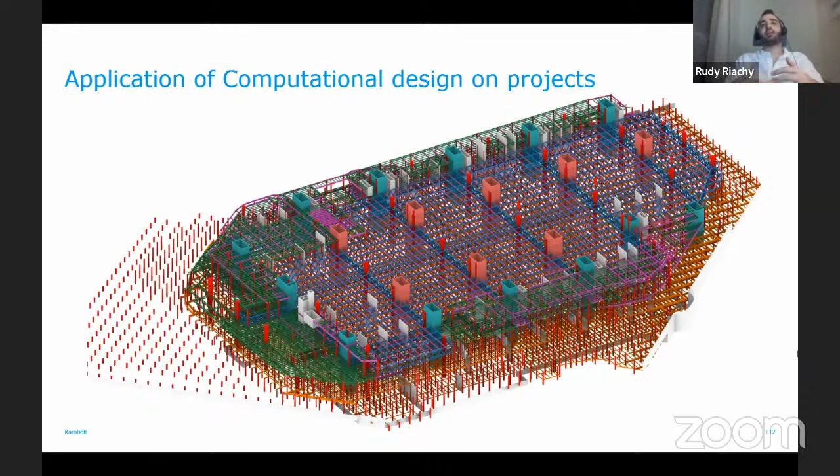So let me just tell you, if you come to my screen, most probably you'll see Grasshopper open, Rhino open, Revit open, maybe ETABS open, several software open at the same time, and all these software are working together, communicating. And this is the most use of computational design in our industry, how we can benefit from all these software together. So I'm using Grasshopper to do this geometry and push it into Rhino. I'm using Grasshopper and Rhino to create the model and then push it into Revit.

I no longer design in Revit. I just design in Rhino and Grasshopper using code. So if I change the design, it will directly update in Revit. Same goes for ETABS. So if I link Rhino and Grasshopper to ETABS, I can also generate an ETABS model very efficiently for the engineers to analyze.

I can generate different systems, structural systems, and all of them can be analyzed at the same time and be backed up with a lot of rich data. So then when we want to really choose the best layout, the best system for the client, we can prove it with all these options and all these attempts that we tried and iterations, and we can tell them that we chose the most optimized design.

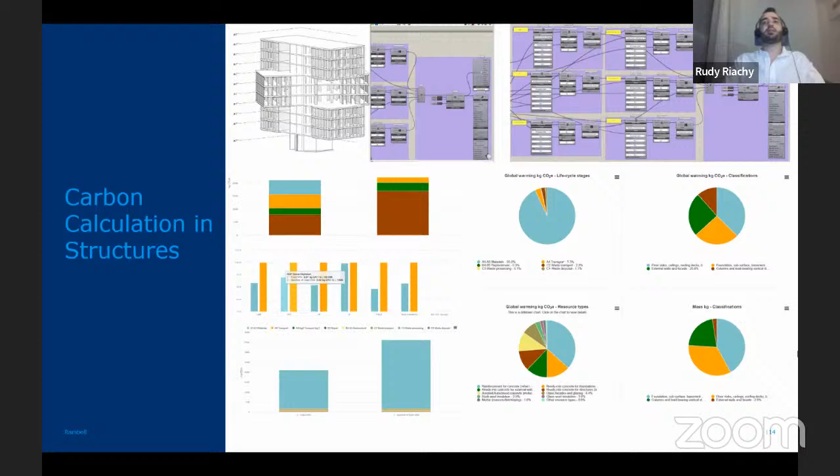To end up with a small quote that I like from Neil deGrasse Tyson, he's an astrophysicist. He says, as the area of our knowledge grows, so does the perimeter of our ignorance. The moment you stop making mistakes is the day you can be pretty sure you are no longer on the frontier. And if you think about it, computation design should lie on the edge of our knowledge. We're always trying to learn the new tools, the new workflows, the new approaches. It's fine if we make mistakes. It's fine if we take a bit more time to learn the new skill set, but eventually it will pay off.

And a lot of people always come up to me and tell me, Rudy, why do I need computation design? I've already been doing it using the usual approach, using AutoCAD, Revit, and other software, and I can finish the project from A to Z without using computation design. Well, then I always answer that if you stay in your comfort zone, if you think that this is the only workflow that you will be working on, your competitors, your other colleagues, everyone will be building the skill set and they will do the same job much faster, better quality, and better results. And this will show up with time.

And hopefully this presentation would help you at least look into computation design as a thinking, as the future. And don't forget, AI is a subset of computation design, and you know what's happening nowadays with AI. And in the near future, if anyone is hiring, there will be computation design as part of the requirements. You can already see it nowadays. Everyone's talking about it, but in the near future, it will be like an obligatory thing. You can no longer use your traditional approach because it's not so efficient.